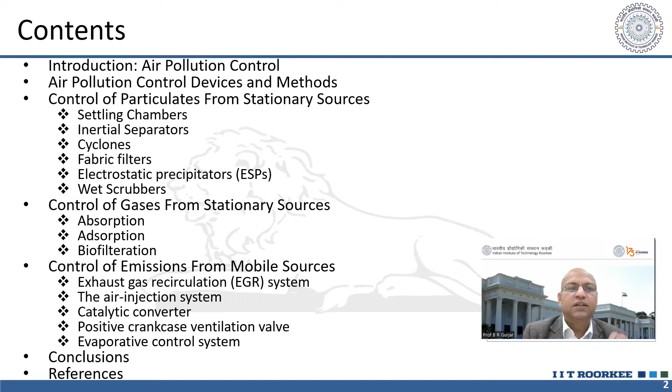Then if you want to control air pollution emissions from mobile sources, different methodologies are there, like exhaust gas recirculation or the air injection system, and catalytic converters, which all of you know we use quite frequently in our cars and vehicles. And then we will conclude, and after that we will see these mitigation measures.

So when we talk about air pollution control, there are several sources of air pollution. It can be natural, like volcanic eruptions, sandstorms or forest fires. But man-made or anthropogenic emissions are from industries, the transportation sector, and domestic sectors, which we discussed in the emission inventory lecture. Those human activity based sources we can control. The devices and methodologies we will discuss focus on those particular sources.

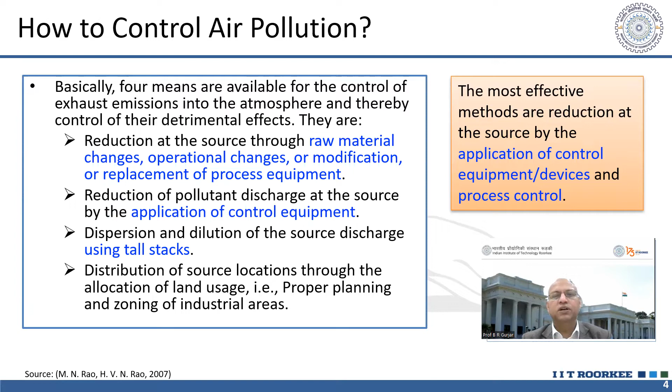Now, when we talk about the controlling mechanism, we have to see different possibilities. Maybe we can change the raw material, we can change the process, the methodology, or some equipment. So in the production line or process line, we can apply those principles which can control or mitigate the air pollution emissions.

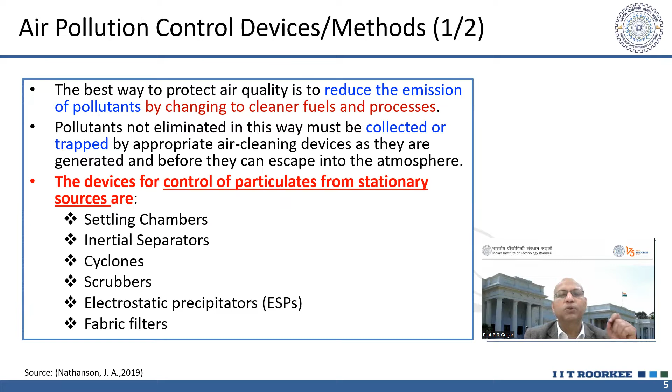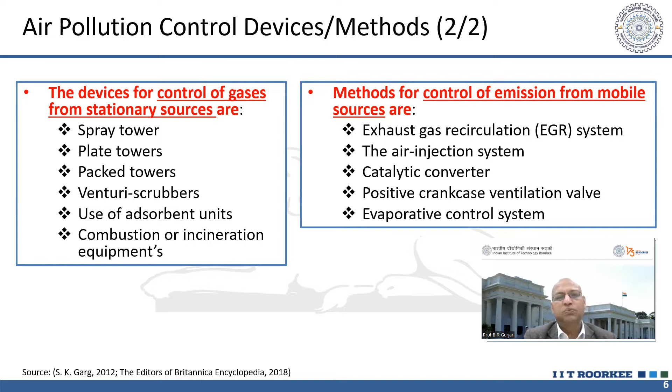When we talk about particulate pollution from stationary sources like chimneys or stacks in power plants or other industrial setups, there are several devices like settling chambers or inertial separators, cyclones, scrubbers, electrostatic precipitators, and fabric filters. These are the most popular devices used in these industries. For gaseous pollutants, spray towers or packed towers, venturi scrubbers, and adsorbent units can be used, and for mobile sources, as I said, catalytic converters.

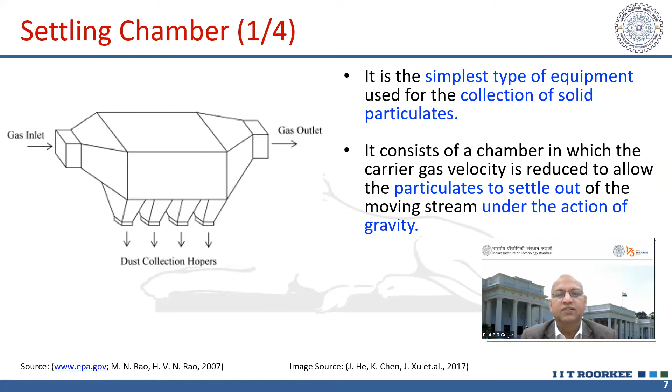That is the fundamental thing: the velocity of the gas and the velocity of the particles are the governing parameters of the design of these settling chambers. They are very simple, but they need a lot of space. That's why they are not much popular. Plus only coarse particles can be removed, not the fine particles. Fine particles will short circuit directly through this path.

Although one can have different trays and different combinations incorporated in the settling chamber, still it is mainly used for pre-cleaning purposes. Otherwise it is not much used, because only particles above 40 micrometers in diameter can be removed easily. Fine particles will just go with the exhaust emissions.

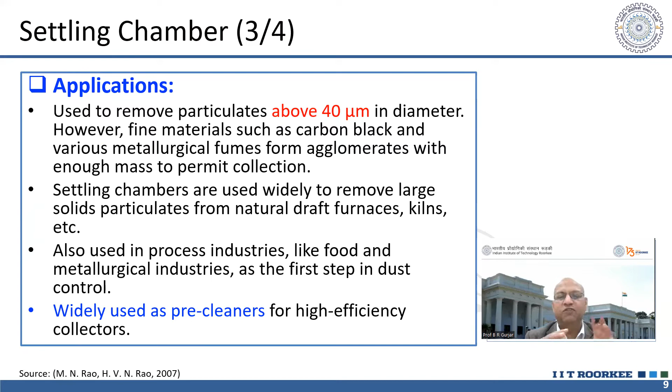As it is written, they are widely used as pre-cleaners, because when we want to use sophisticated devices and reduce the pollution load, better you first pass through the settling chamber so that coarser particles get settled and fine particles can be removed by the sophisticated device. There are advantages and disadvantages, like low cost, and it is almost maintenance free.

No skilled personnel are needed for operating this kind of device, and it can be used for dry and continuous disposal of solid particles, and it can be constructed with any kind of material, whether steel or other kind of material. The temperature and pressure of those exhaust gas plumes can vary depending upon the material.

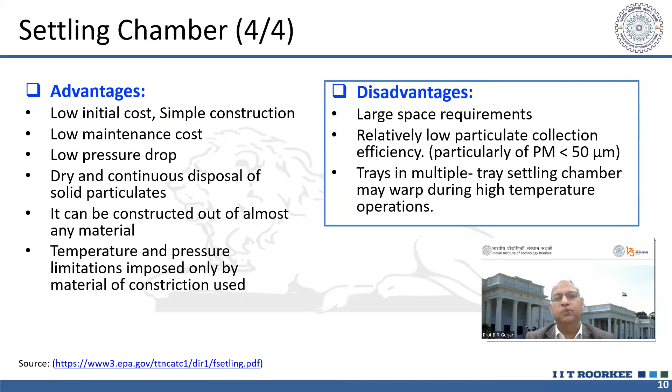But there are disadvantages, because in cities land is very expensive, and for this a lot of space is required, so this is not desirable. It has relatively low particle collection efficiency for particles which are less than 50 micrometer in size. Otherwise 40 to 50 micrometer and above particles can easily be removed, but for lower dimensions this is not a good device.

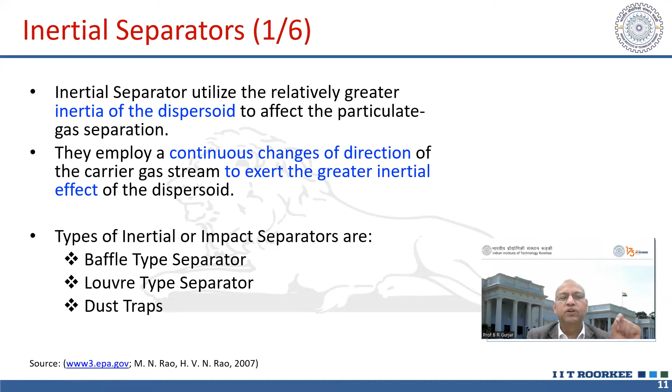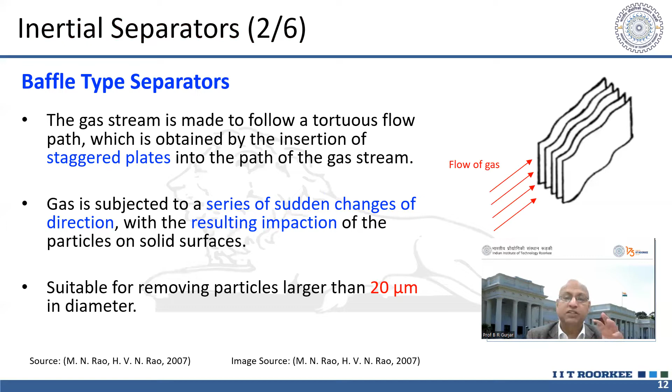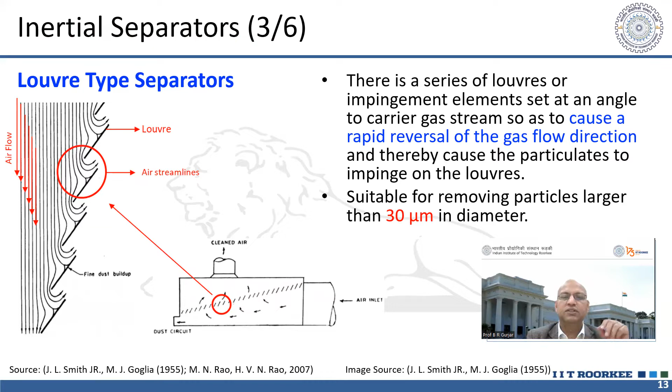But this is good for removing particles which are larger than 20 micrometers. So it is better at removing particles less than 40 in size, which was not much possible in the settling chamber. But still it is not good for particles less than 20 micrometer. When we talk about louver type separators, again the change of direction, inertia and impaction are there, and the particles can be removed. But the limitation is that this device removes particles larger than 30 micrometer.

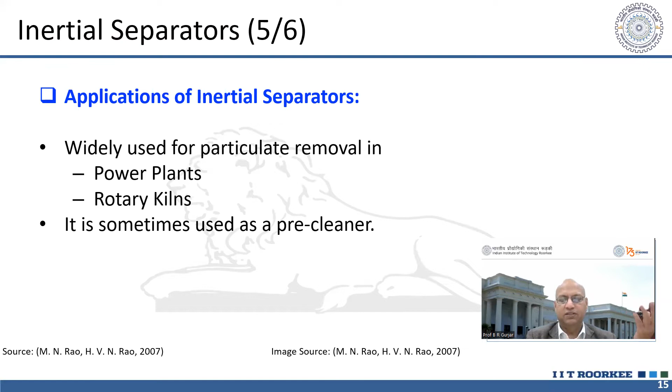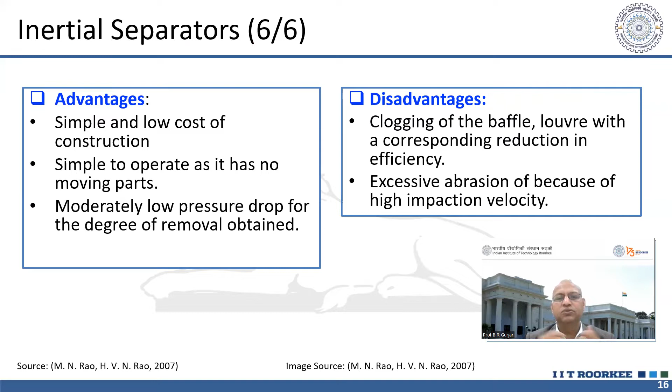These inertial separators can be used in power plants or rotary kilns to remove particulate pollutants. It is also sometimes used, like the settling chamber, as a pre-cleaner. There are advantages and disadvantages: it's simple and low cost construction, operation is also simple, and there is low pressure drop. But the disadvantages are that baffles can be clogged, and efficiency can be reduced after that. Excessive abrasion can occur because of this impaction, so wear and tear is possible.

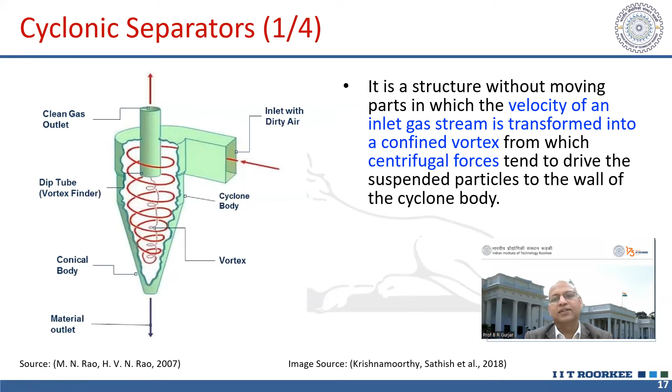Then cyclonic separators are there. Basically rotational velocity is there, and it's a very simple device, but due to rotation centrifugal force is there, and particles strike the wall of the cyclonic separator, lose velocity, slide down, and get collected in the hopper at the bottom. So that's a very simple device, the cyclone separator.

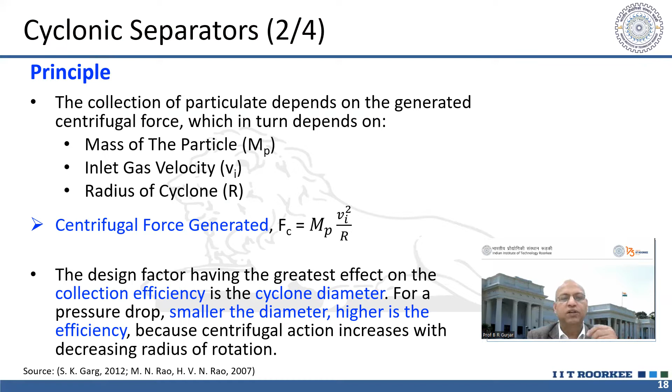The mass of the particles, the gas velocity and the radius of the cyclone determine the centrifugal force, and accordingly which size of particle can be removed efficiently. You can play with these relationships, and you can remove very fine particles up to 10 micrometer. Up to 10 micrometer efficiency is about 90%. Larger particles can be removed more efficiently, like 95%.

When particle size is 20 micrometer or more. It can be operated at very high temperature, around 1000 degrees Celsius, 500 atmosphere pressure, and it can handle a very wide range of gas volumes, like 0.85 to 700 cubic meter per minute. So it is a wonderful device. But if there is a leakage, the efficiency goes completely; it is almost not usable. So there are certain advantages and disadvantages.

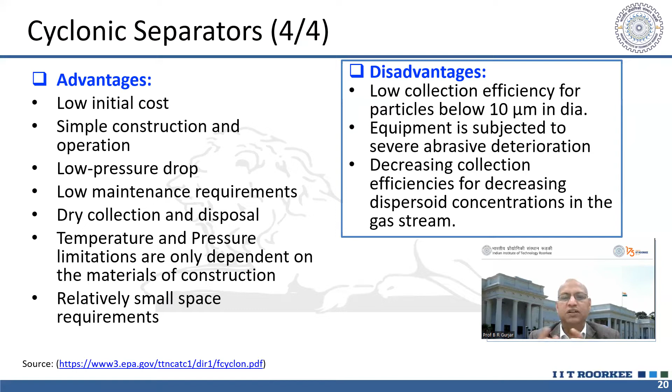It has low initial cost in comparison to sophisticated devices like ESPs, electrostatic precipitators. It is simple in construction, with low pressure drop, low maintenance, and dry collection and disposal. Variation of temperature and pressure can be handled, but efficiency is low for particles less than 10 micrometer. Also collection efficiency decreases when some issues are there with the gas stream and particles. Okay, when we talk about fabric filters, they are also known as baghouse filters.

They are very good and high efficiency, up to 99%, and particles in the size range of 0.1 micrometer to 1000 micrometers. So a very large range is there. So this is a wonderful device. Only problem is that for high temperature it can't be used, because fire problem may be there.

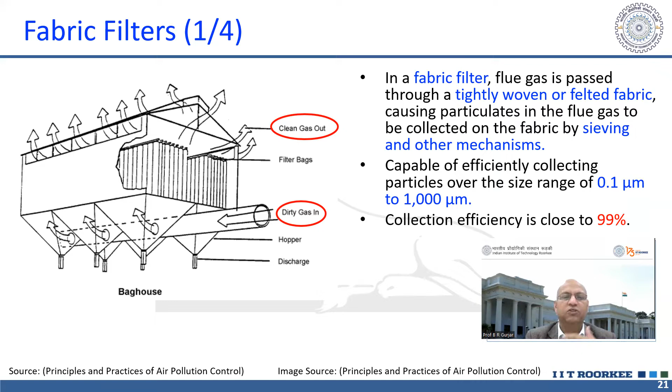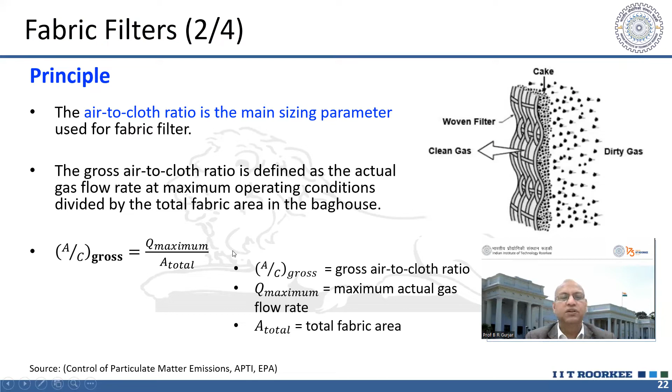But different kinds of fabrics are available these days, and different temperature ranges can be handled by this. There is the principle of pore size. So this air to cloth ratio has to be maintained to have good efficiency, and this simple equation is used for calculating air to cloth ratio. Otherwise, when these pores are clogged, efficiency decreases and pressure drop is there. So continuously you have to clean it by vibrations, etc.

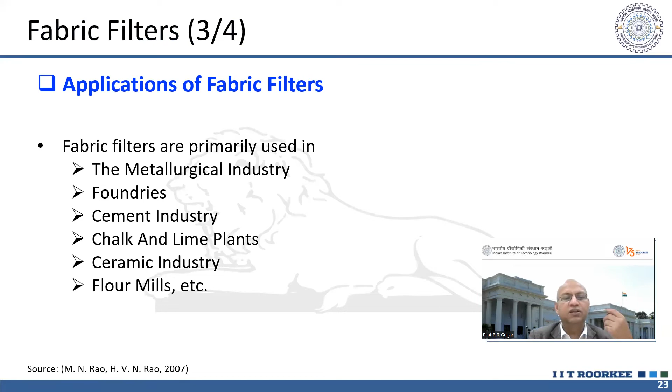Application can be in several kinds of industries like metallurgy or foundries or cement industry, ceramic, flour mills, etc. It's widely used basically. There are again some advantages and disadvantages. Advantages are very high efficiency, effective for a wide range of dust size, as you have seen. Dry collection and disposal is good. For moisture it is not good because clogging will happen.

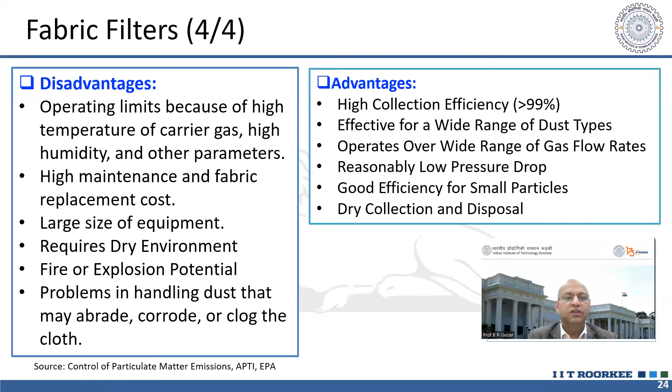So disadvantages are there. It's a large size, and it requires a dry environment. Otherwise, as I said, moisture will clog these pores and the efficiency will drastically reduce. Then there are other issues also, like fire and explosion potential may be there in certain cases. So skilled manpower is needed. There are other devices in these kinds of circumstances or situations.

This is ESP, electrostatic precipitator. When particles go through a certain charged area, they get charged, and then due to the opposite charge of those plates, they get attracted, slide down and get collected into the hopper. It can remove particles less than 10 to 20 micrometer, and very good efficiency is there.

Principle is this charge based, but there may be some issues, because sometimes ozone formation may be there, and high voltage equipment is used, so skilled manpower is needed. Those kinds of issues are there. Particles as small as 0.1 micrometer can easily be removed. So that way it is a wonderful device, and for several power plants, etc., it is used very much, but initial cost is very high basically.

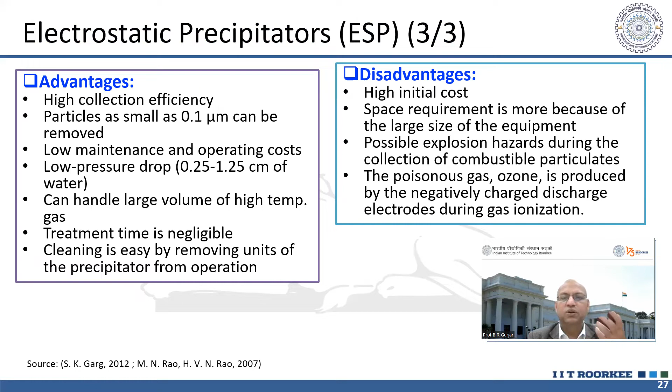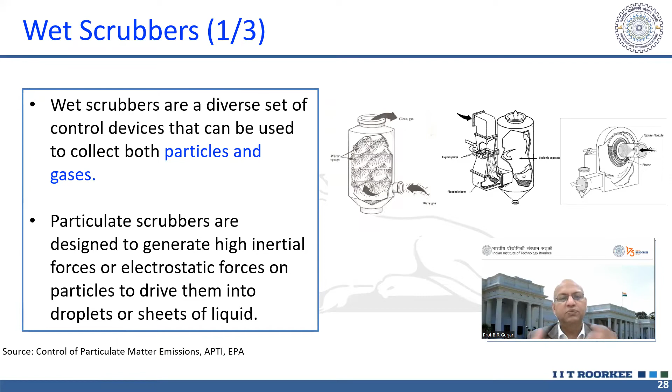So small scale industries can't afford it, and as I said, it can have some issues with ozone, and some explosion hazards may also be there if it is not operated properly. Then there is the wet scrubber, which can be used to remove particles as well as gaseous pollutants, because it scrubs through absorption in liquid, some sort of absorbent we are using in this particular device, and you can see several kinds of features are there.

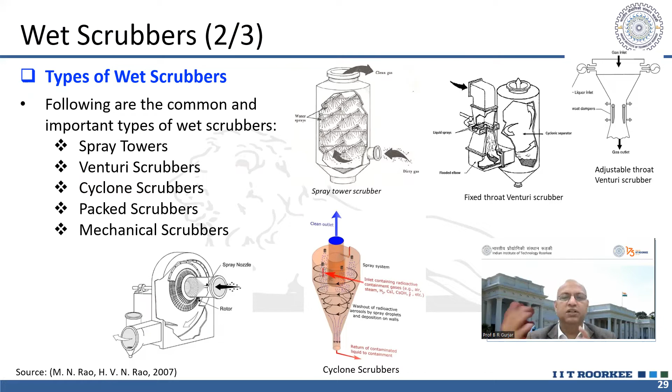This can be a cyclone scrubber, simple scrubber, spray tower or fixed throat venturi scrubber. So different kinds of spray towers and scrubbers can be used depending upon the situation. There are advantages, because it can handle even high temperature gases, because it is using liquid. You can use some liquid with some chemical or simple water also, depending upon the requirement. Relatively low maintenance, and it provides cooling for the hot gases, so that is one more advantage.

But there are disadvantages also, like it produces wastewater, because air pollution is being converted into water pollution. So you need to treat wastewater basically. And then there is a corrosion problem, because an acidic environment occurs due to SO2, etc. Corrosion happens, so more operational cost may be there.

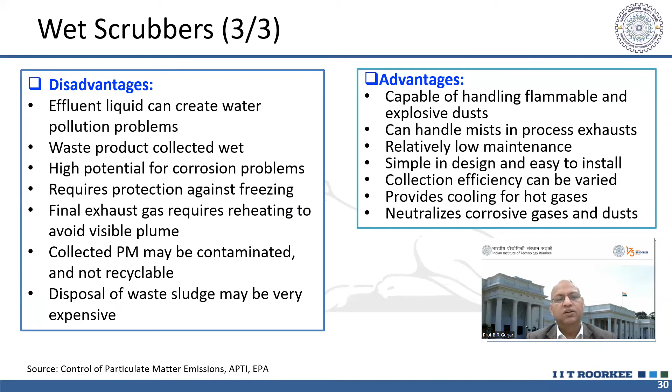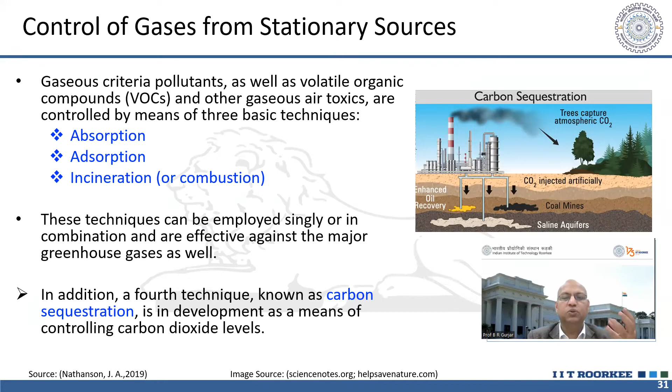When we talk about gaseous pollution control from stationary sources, we talk about three major principles: absorption, adsorption, and incineration or combustion. So depending upon the nature of the gas, we use any of these mechanisms. For adsorption, activated carbon, etc., which have a lot of porosity, adsorb these gases. Activated carbon or zeolites or synthetic polymers may be there, silica gel.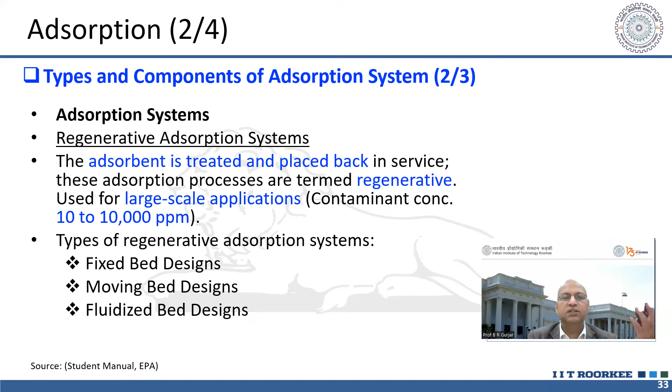So again, depending upon which gas you want to remove and which is a good adsorbent, you can use it. But the issue is that we have to regenerate it after some time. So adsorption systems can be used in different kinds of systems, like fixed bed designs, moving bed designs, or fluidized bed designs. So the industrial setup will decide which kind of design is needed.

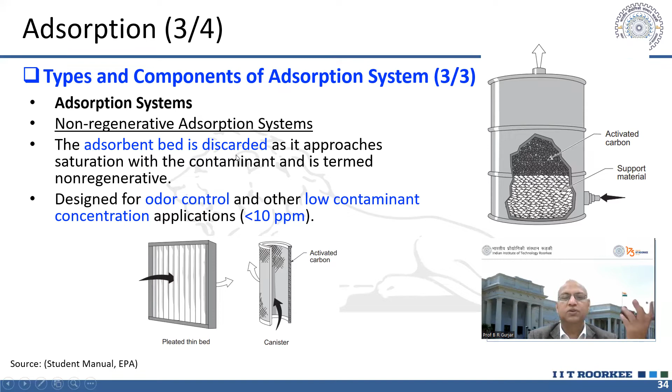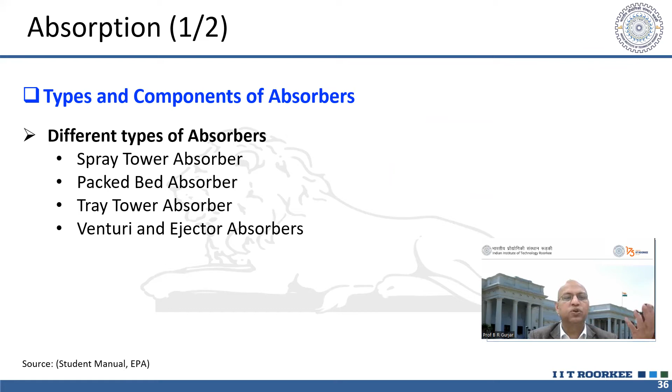Then you can see systems like non-regenerative, which you use and throw. Acid gases and organic compounds can be handled with this particular mechanism. Then we come to absorption. In absorption, spray tower absorber, packed bed absorber, tray tower absorber, venturi or ejector absorbers can be used, again depending upon the industry.

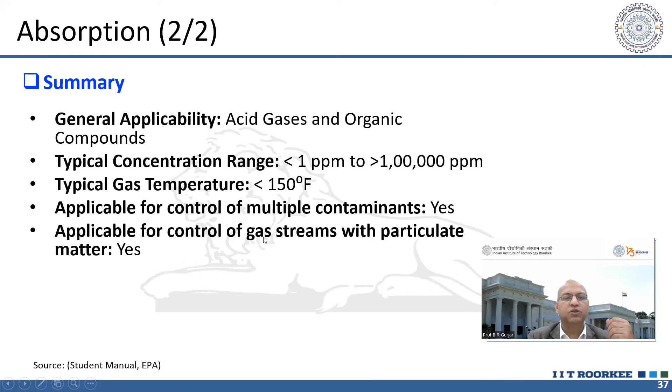And acid gases and organic compounds can be removed. Plus, biofiltration is also one way of removing these gases. Microorganisms derive energy out of that organic material, and they remove those pollutants, right? And organic compounds can easily be removed by biofiltration.

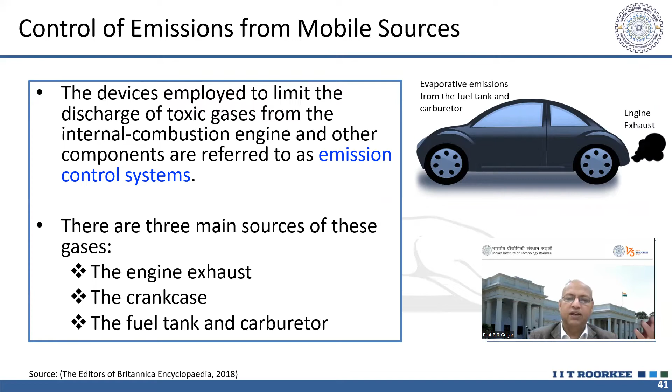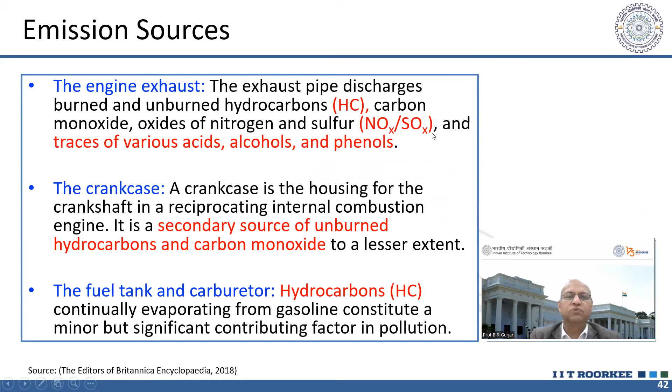When we come to mobile sources, we talk about emission control from engine exhaust, crankcase, fuel tank and carburetor related emissions. So accordingly, devices also differ, and the pollutants are also different in that sense. Like in engine exhaust, you can see hydrocarbons, NOx, etc. And from the fuel tank, carburetor, etc., hydrocarbons will be there.

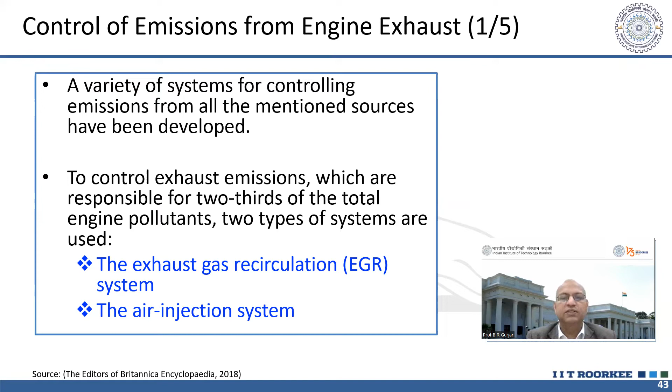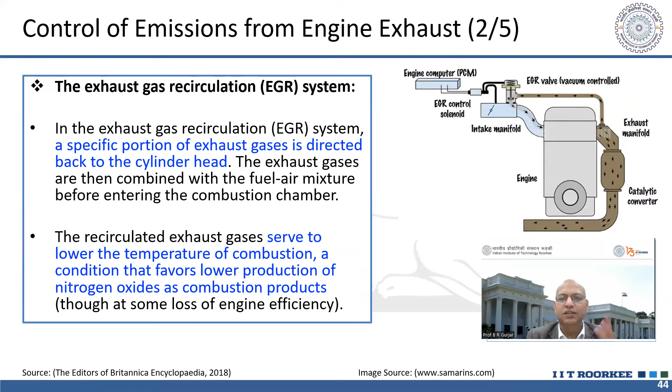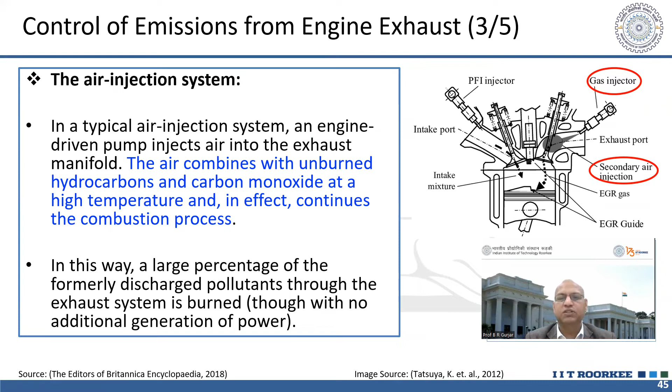So exhaust gas recirculation can be there, or an air injection system can be there. You can see these pictures, and in detail you can see afterwards. Otherwise, we have so many slides, so I will quickly skip them. You can go through them at leisure, and we can discuss later on. But these are the devices, like the air injection system, which can combine unburnt hydrocarbons, so efficiency increases. You don't waste many unburnt hydrocarbons.

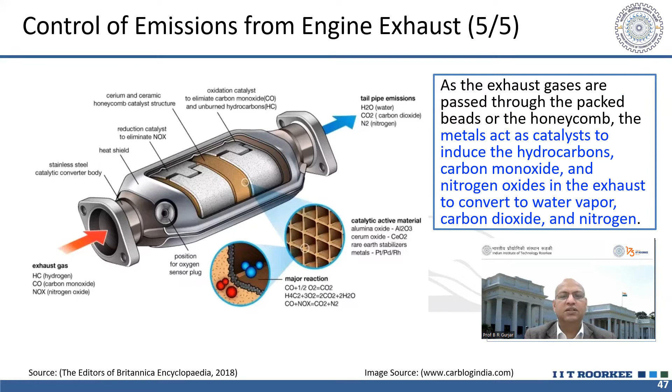Then there is the catalytic converter, which is fitted in the exhaust pipe, and it is very widely used. It can convert NOx, CO and hydrocarbon emissions into carbon dioxide, nitrogen and water vapor, because these are harmless gases which are in the atmosphere, as you know. Of course, CO2 and H2O are greenhouse gases, but as such they are not toxic. So these are the catalytic converters which are used.

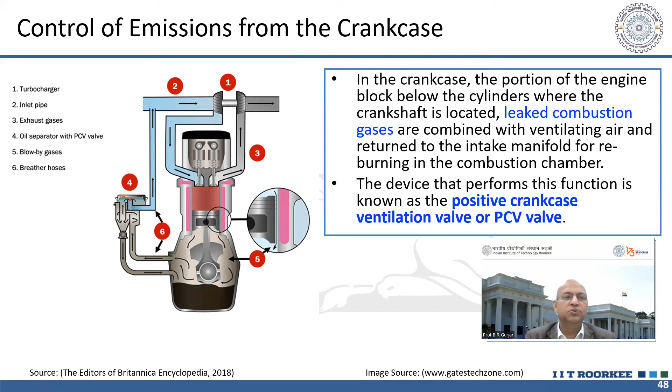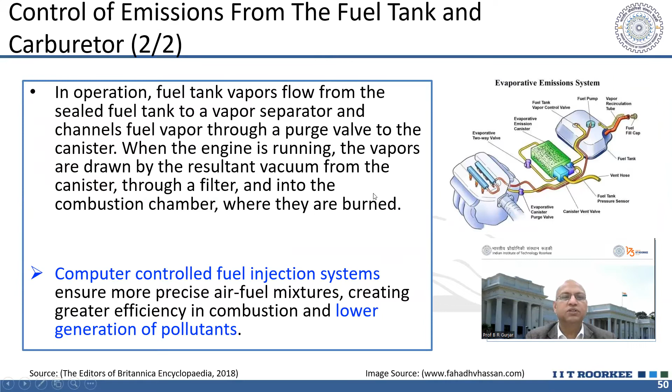Then in the crankcase there may be this kind of system where you can collect the leaked combustion gases and use them again for burning. Carburetor related emissions can also be collected and used. And you can have these kinds of systems to control emissions from the fuel tank and carburetor.

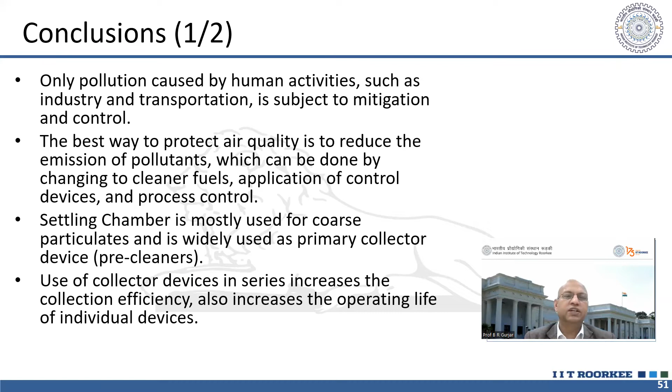So in conclusion, from an air pollution control point of view, depending upon the source, whether it is a stationary point source or mobile source, whether it is a coal-based thermal power plant or some gas-based activity, and depending upon what kind of pollutant we want to remove, whether particulate matter or gaseous pollutants, the device can be suggested accordingly. And we have seen that for particulate matter, ESPs are good, but the initial cost is high.

Now we come to the second part, that is the sector-wise mitigation measures to control air pollution, because we have different emission sectors like transportation, domestic, industrial. So accordingly, we can have different policies and programs which can help us prevent or mitigate those emissions. And when we talk about sectors, agriculture sector is there, power sector is there. We have already discussed these sectors when we discussed emission inventory, right?

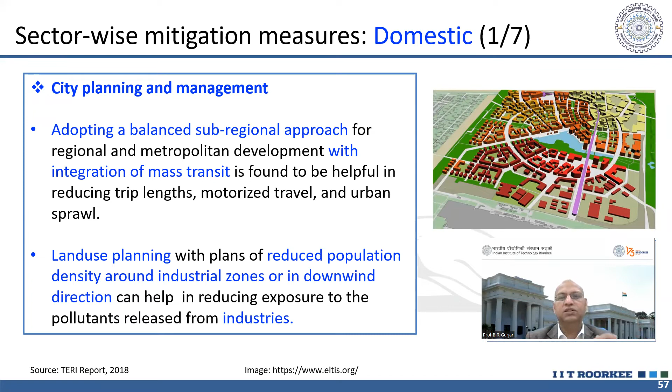In fact, during the planning of a city, if you pay attention to zoning, like industrial zones and green belts, you can easily handle the situation and air quality deterioration can be avoided. And domestic emissions can be reduced drastically. Biomass burning, like wood or cow dung, can be avoided if we supply LPG.

So, Pradhan Mantri Ujjwala Yojana is there, and they are supplying LPG to the poor segment of the population. That way, they are also helping reduce a lot of emissions in that setup, because in rural kitchens they use a lot of wood, etc., which is highly polluting because the burning process is not so good. But LPG is a cleaner fuel in comparison.

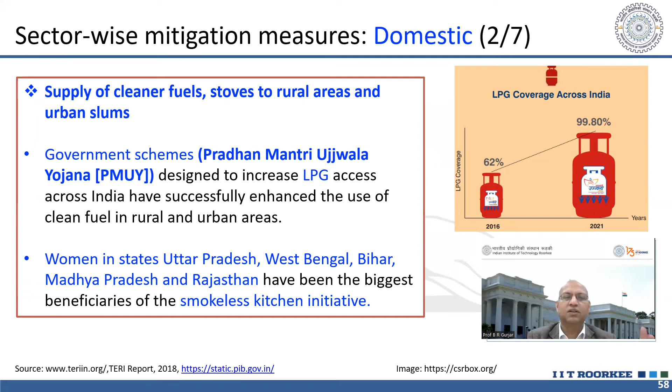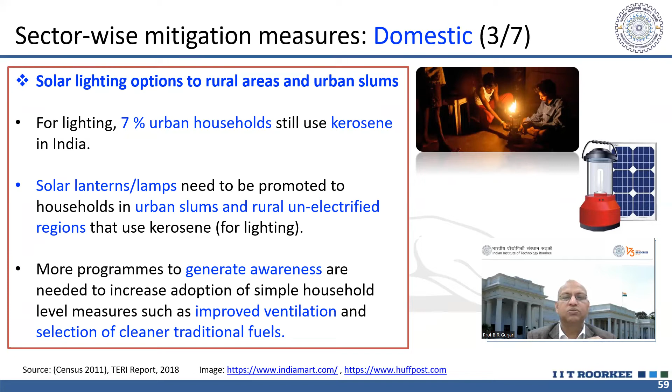Then if we go for solar lighting, like solar lanterns or lamps, that is also good, because I remember in my childhood we used to have kerosene based lamps in houses. Those were quite polluting light sources, so those are not good. And if you go for solar lamps or electric lamps, then of course emissions can be drastically reduced.

Then when we talk about refuse burning or waste burning, if we can ban it, it's a wonderful way of controlling particulate matter emissions and other toxic emissions, because in our society we have this very peculiar habit: people collect the waste and, without thinking, they just burn it. That's not good, right?

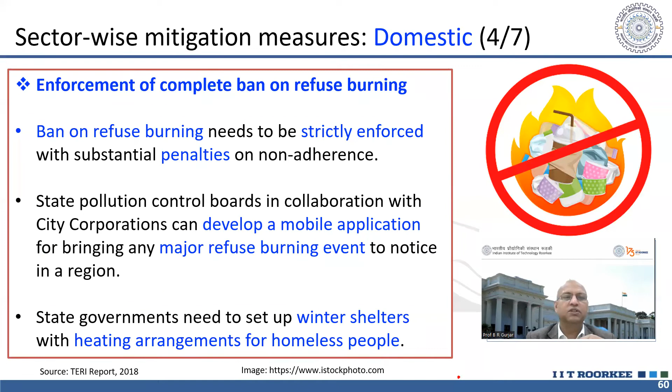So we have to collect waste and, if possible, segregate and dispose of it properly to reduce emissions from refuse burning. Some policy measures can help, like mobile applications to inform the municipality about places where refuse is dumped and may be burnt, or is being burnt, so they can come and take it away. These are waste to energy options.

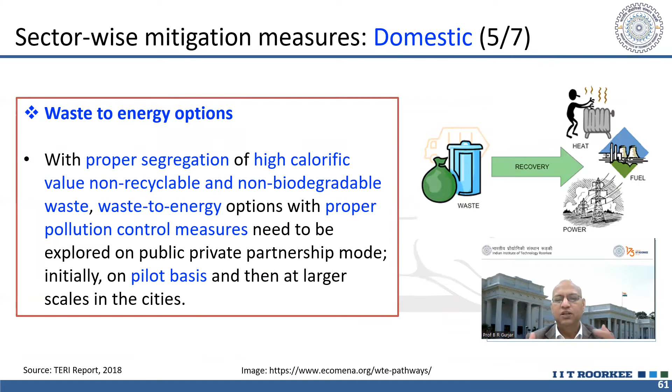Let me share with you, in the Linköping city of Sweden, when I visited, I saw that the complete city's public transportation system is based on energy derived from waste. They have biogas from slaughterhouse waste through anaerobic digestion, and steam-propelled electric generation by burning other solid waste, with warm water circulated through the entire city. So waste to energy options can be good, particularly in our country where we are energy deficient. But this is only possible when we segregate waste at the source and have good calorific value to convert that waste into energy.

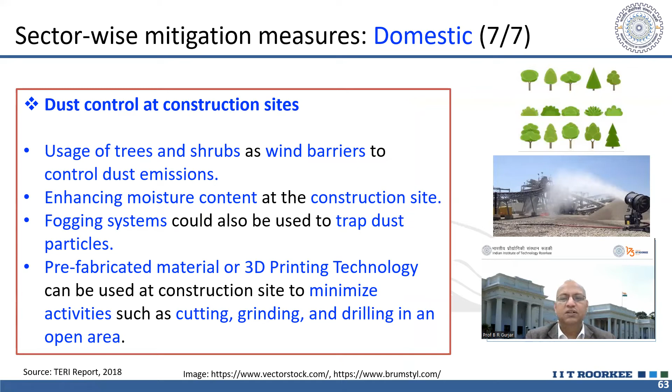Organic waste can be converted into biogas. When we want to reduce resuspended dust pollution, we have to clean the road, so we should have paved roads so there are fewer chances of dust resuspension. We can also use fogging systems or sprinklers to avoid dust suspension, particularly at construction sites.

When we talk about the transportation sector, the avoid-shift-improve approach is very good. We can avoid travel demand when we don't have to travel—if meetings happen online, minimum possible travel can be done, otherwise it can be avoided. We can also shift from private to public transportation, or from motorized to non-motorized transportation like bicycles.

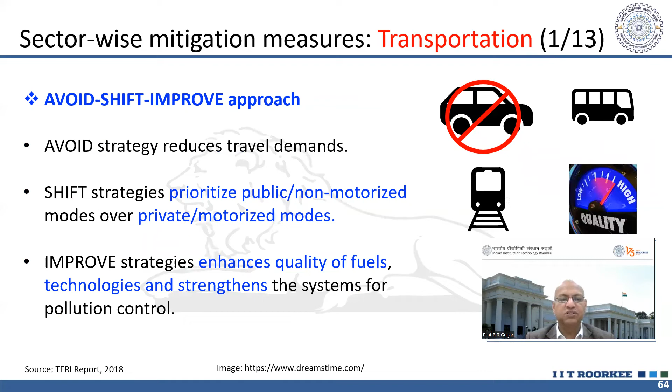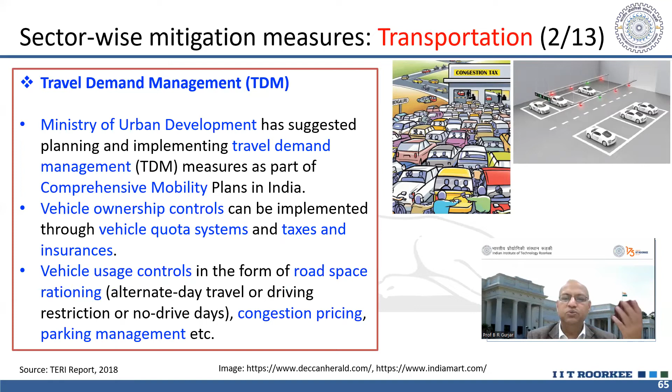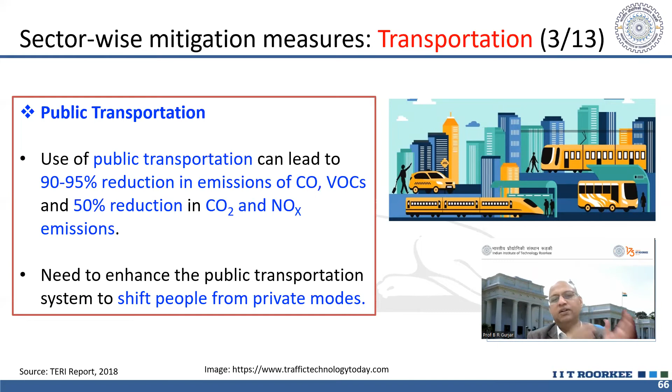If it's not possible to avoid fuel-based transportation, we can go for cleaner fuel-based systems. Better planning can also help, like travel demand management and intelligent transportation systems, so congestion is avoided and public transportation is used more. Nowadays TOD-related planning is very important, so demand can be met in a particular area. Non-motorized transportation is also key—in European countries they have very good infrastructure with dedicated lanes for them.

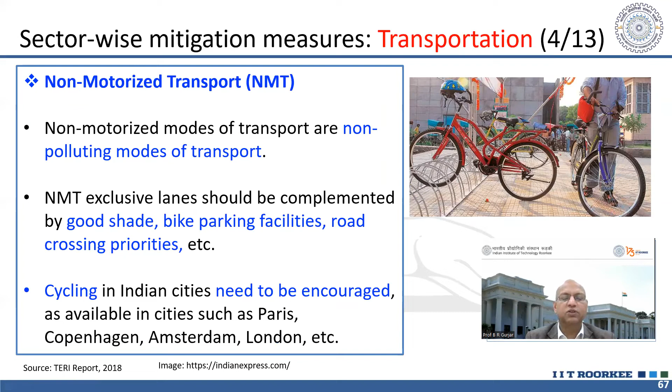When we talk about better fuel quality, in India we've gone in this direction—from 2003, with the auto fuel policy, we've moved toward cleaner fuel, from BS4 now jumping to BS6 already. This is one way of achieving lower emissions, because BS6 is a much better fuel quality and per unit of fuel burned gives far fewer pollutants.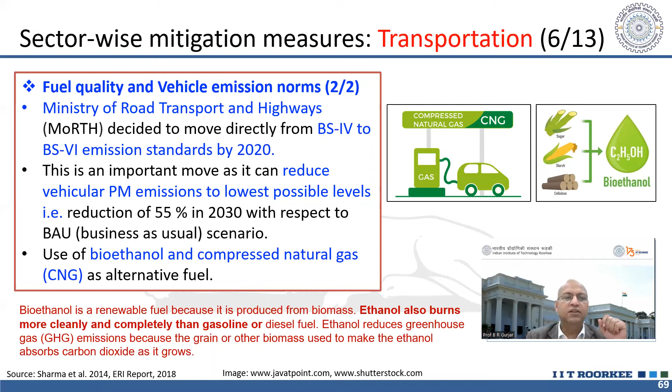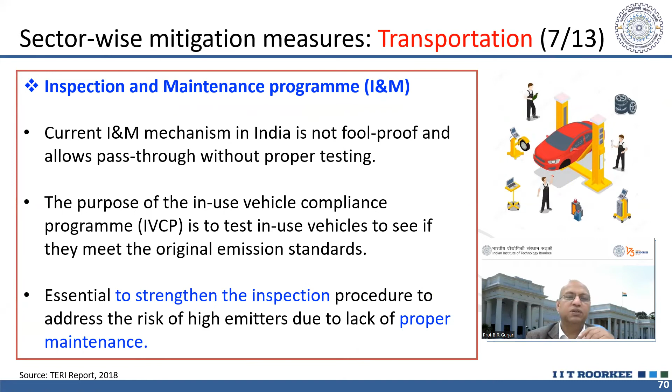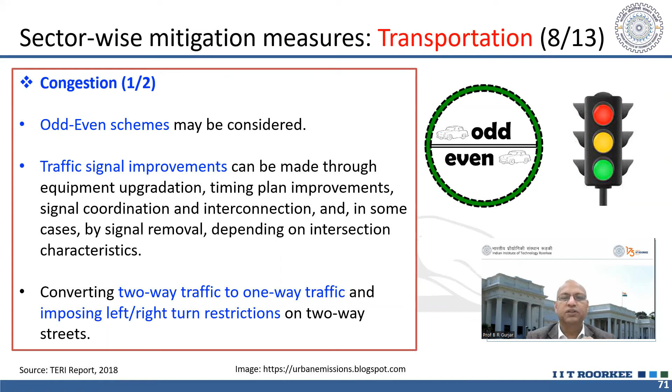We can also have inspection and maintenance programs that are properly managed. Nowadays many apps exist that can figure out whether a car needs to go to the garage, and these can be integrated. Schemes like odd-even can reduce the number of vehicles on the road and avoid congestion—otherwise congestion causes a lot of emissions due to slow speed and excess fuel burning. Dedicated lanes for certain traffic can also help.

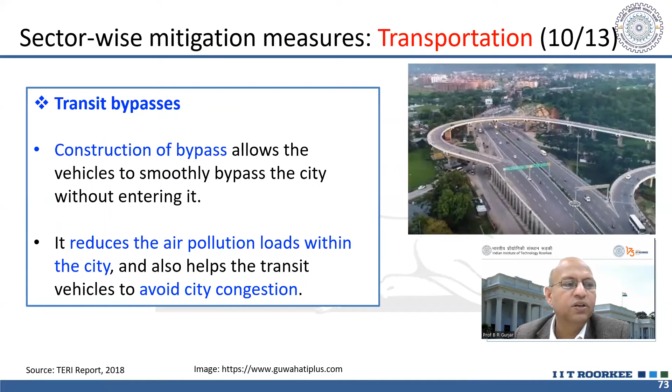Bypasses can also help—as you can see in Delhi, there's the eastern peripheral expressway, so interstate vehicles don't have to enter Delhi. If they want to go to other states, they just bypass the city, traveling at high speed with less emission, without needing to pass through the city itself.

Then there's road-to-rail freight improvement—we are building corridors, high-speed rail corridors that will cater only to freight and heavy-duty goods. We can also use inland waterways. Bangladesh caters to around 20 to 30% of its goods transportation this way, whereas in our country we are still, I think, below 5%.

Huge scope is there in inland waterways, and emission per unit of load is very less in inland waterways compared to other modes. So we can shift goods transportation from highway to railway, and railway to inland waterways. Those kind of things we can think of.

Then electric mobility, lot of emphasis is there in our government. Even during budget, you might have noticed that battery swapping kind of schemes are coming, which will make it quite easy for electric driven battery based vehicles. That way, the pollution coming from the transportation sector will be drastically reduced.

Although people have different viewpoints also, like they say that if you generate electricity from power plants based on coal, then again pollution is there. But this is a tricky issue, because at least you are avoiding emissions at the breathing level, so health risks may be drastically reduced when we go for electric driven vehicles. There will be issues of battery handling, etc., that we will manage, but at least emissions from the transportation sector will go away, and we will have better air quality in cities.

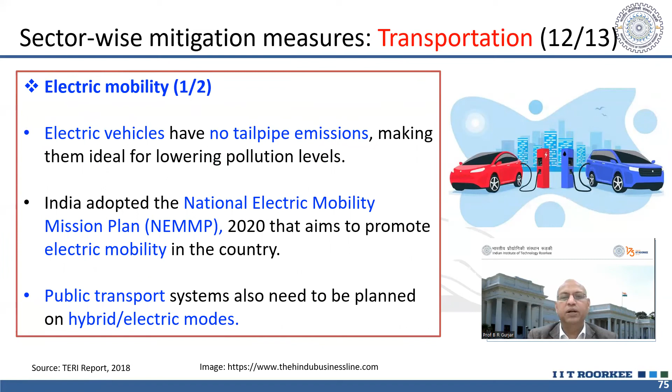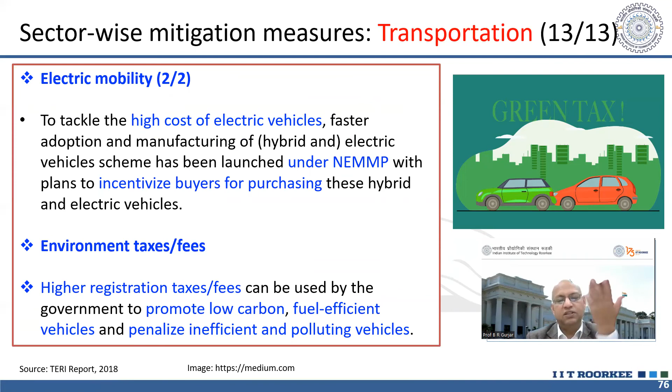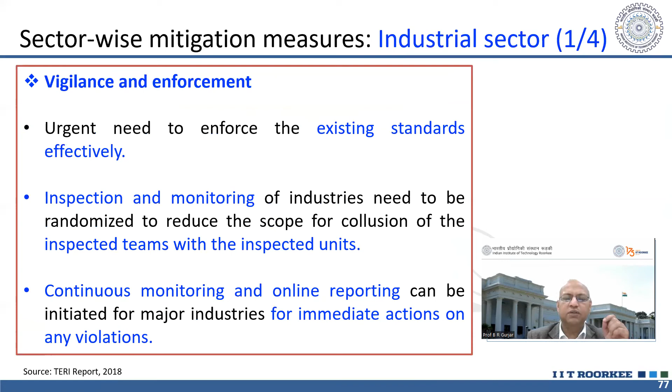So we have to go for electric mobility, and we can generate different scenarios in emission inventory also. Let us say 20% of transportation demand is met by electric vehicles, then how much emission reduction is there, you can easily calculate. Then there may be vigilance and enforcement kind of standards, which can be implemented through digital technology and new technology.

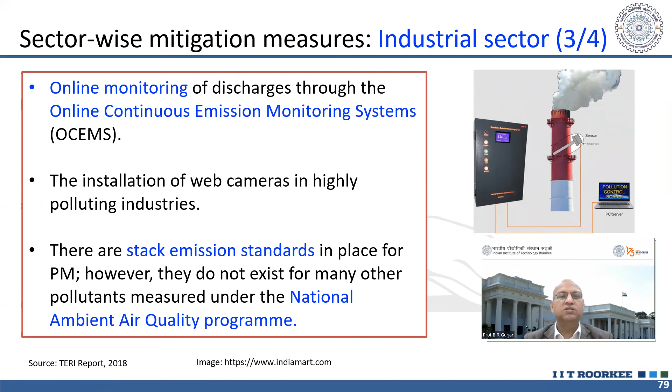Cleaner fuels are always welcome because they are less in emissions. In the industrial sector, they can go for online monitoring, so that we can know how much emission is coming, or if some equipment is not working, we can easily notice the high emissions and timely address it. So in the industrial sector, there are several ways of controlling these emissions.

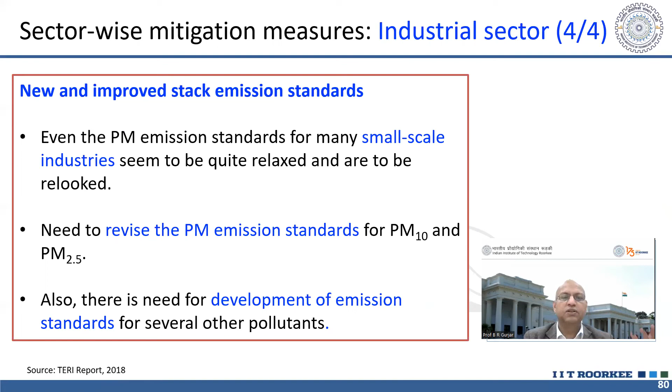Then stack emission standards, if we implement properly, and if there are certain standards for other pollutants still coming up, if we bring those standards quickly, we can control them easily. We can shift coal based power plants to gas based power plants, or coal can be cleaned with better quality coal used. ESPs should be functioning properly, with monitoring to check whether the ESP is functioning or not, so that way we can control those emissions.

When we talk about agriculture activities, agriculture waste burning is a huge problem nowadays. There are now startups coming which can convert that waste into some useful product. If farmers get some income out of that, it would be easy to handle that waste. Otherwise, they quickly burn it, which is not good for ambient air quality in the region.

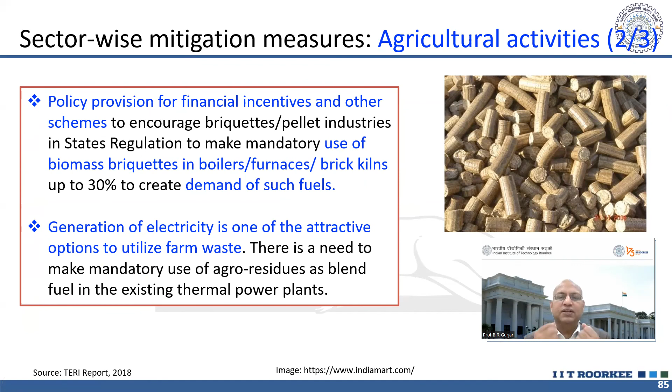Maybe through the MGNREGA scheme or Prime Minister's Employment Generation Program, if we can integrate institutional and local entrepreneurs with these schemes, we can have better results. Plus there is conversion of agriculture waste into pellets which can be used for burning in boilers, furnaces, etc., because these are compressed and their calorific value is enhanced nicely.

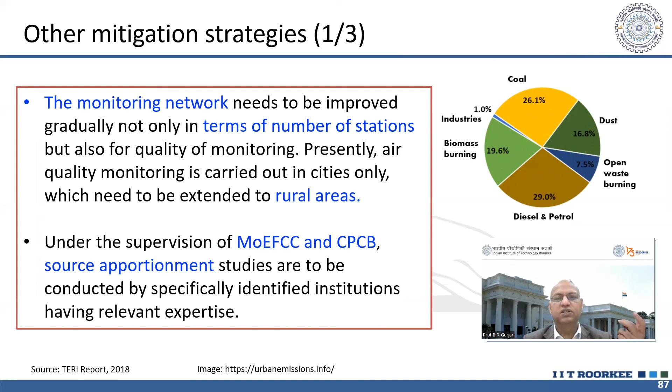Dedicated policies can be there, and depending upon R&D and agriculture practices, we can reduce those emissions. Other mitigation strategies and measures may be there through monitoring networks, or other policies related to biomass burning or open waste burning, which we can implement to improve air quality and reduce pollution.

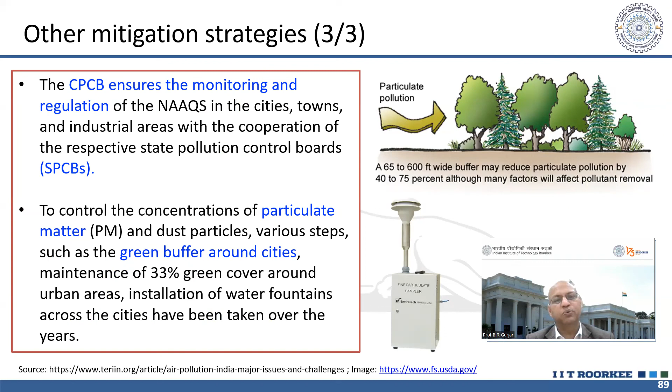CPCB has this particular NCAP program, which will have a great impact over the years to reduce particulate pollution. Several things are coming in terms of policies, programs and technologies, and this is part of this particular activity, so that when you are better equipped with knowledge and skill, you will be able to implement those technologies and programs nicely and reduce those emissions. So these are the ways to mitigate or prevent pollution from different sectors or sources which can be easily used.